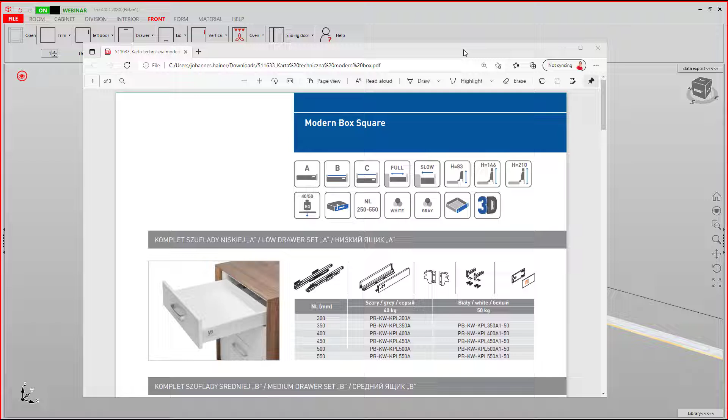Hello. In this tutorial we will add these drawer boxes, or some of them, to TrunCAD.

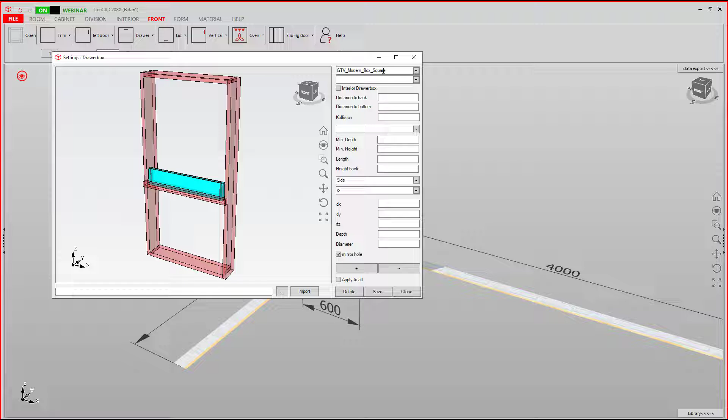Therefore, we go to Front, here to Drawer, and to Hardware Settings. First of all, we need to give our new system a name. Then, we need to specify if it is a wooden drawer or a drawer box system. Additionally, you have the option to set it to interior drawer box.

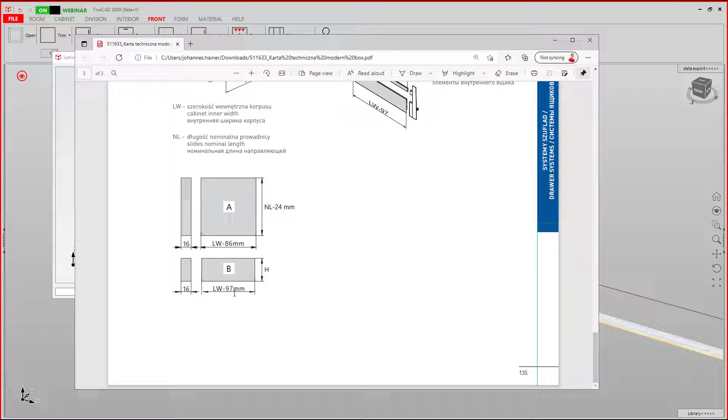Here we need to specify the distance from the side to the back of the drawer and to the bottom of the drawer. As we can see here, we have 86 divided by 2 is 43, and 97 divided by 2 is 48.5 millimeters. This means we have here 48.5 millimeters and here 43 millimeters.

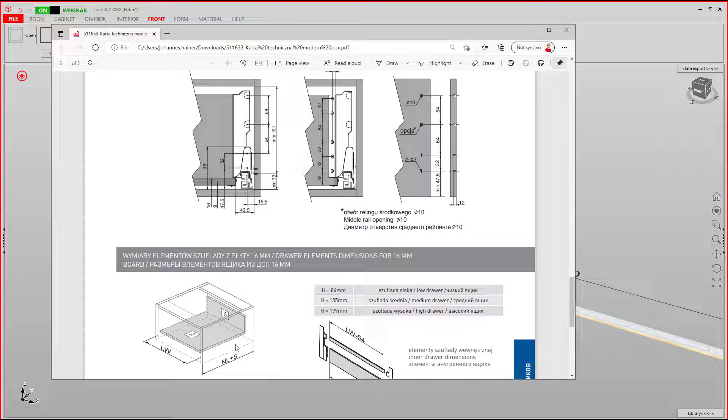Here we need to set a name for each specific drawer box. Then we need to set the minimal depth, which is nominal length plus 5 millimeters. Then we need to set the minimal height, which is 33 plus 63.5 equals 96.5 millimeters.

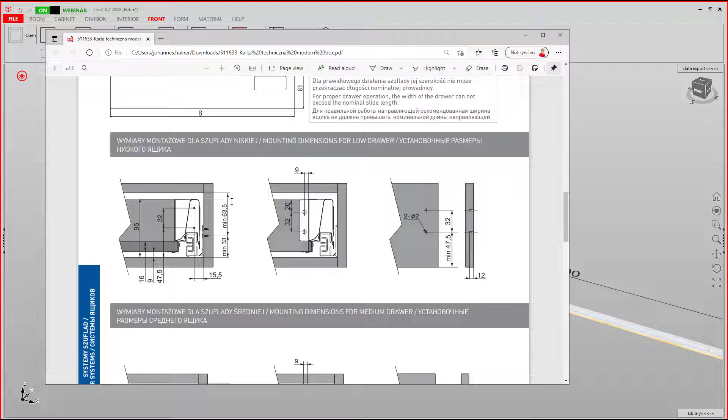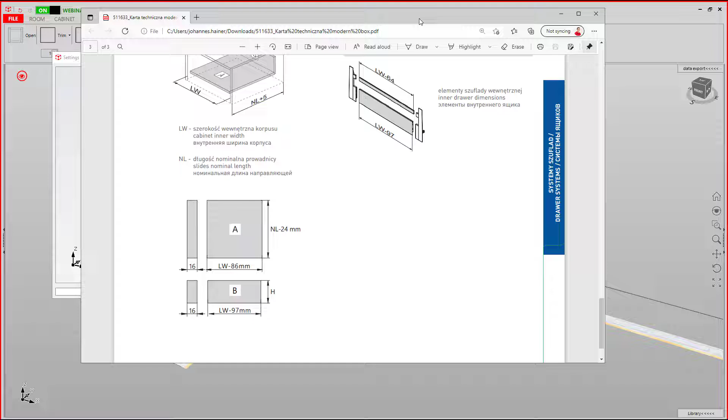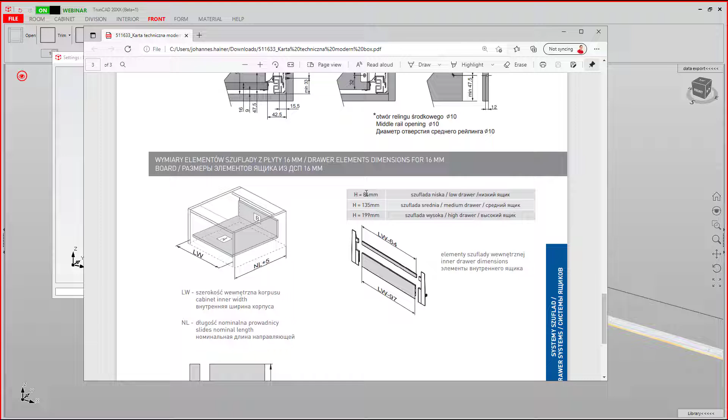Then we need to set the length of our bottom part, which is nominal length minus 24 millimeters, which equals 276 millimeters. And the height of our back panel, which is given at 84 millimeters. Now that we have specified the wooden parts for our drawer box, we can begin to set the boreholes.

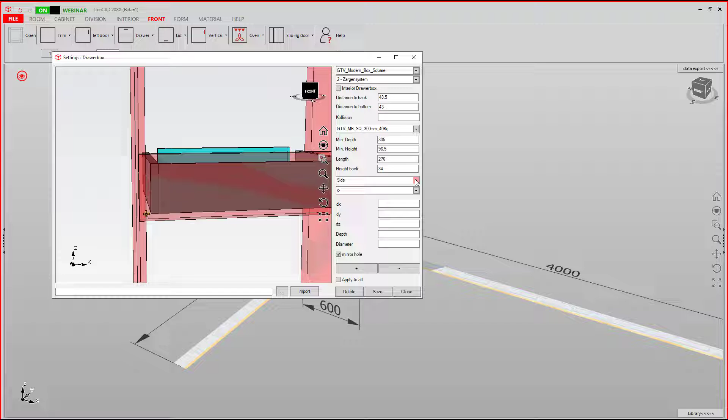First of all, we want to set the boreholes for the side of our cabinets. Therefore, we take here sides and specify the direction of the boreholes, which is x minus. Also, we want to enable mirror hole, so that the holes we create on the left side of the cabinet automatically mirror to the right side of the cabinet.

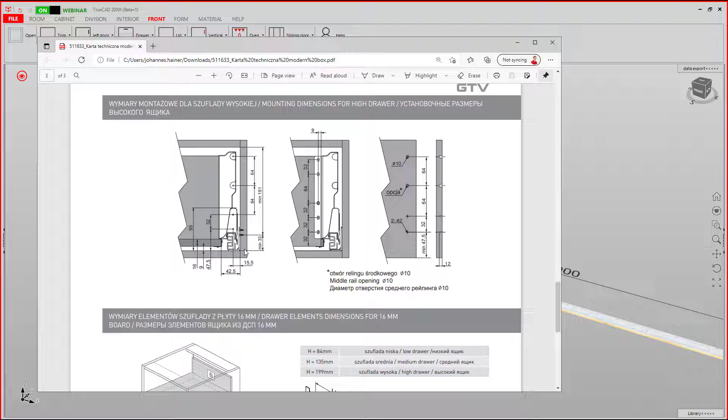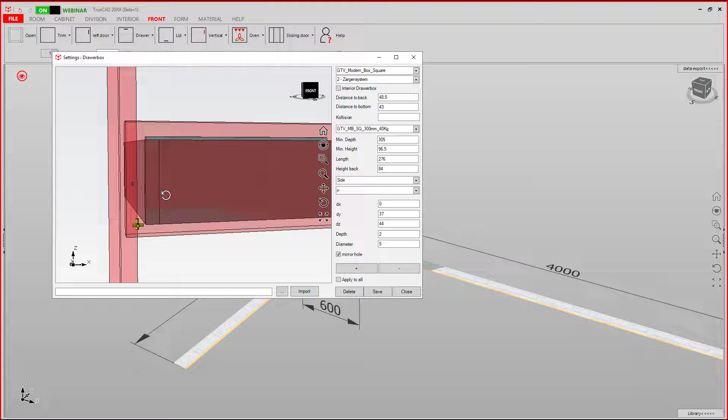So we want to set our first hole in x 0 and y to 37, in Z to 33, plus 11 millimeters, set a depth of 2 millimeters since we have screw mount and a diameter of 5. Now we click plus to add this borehole. And as you can see, the borehole gets created.

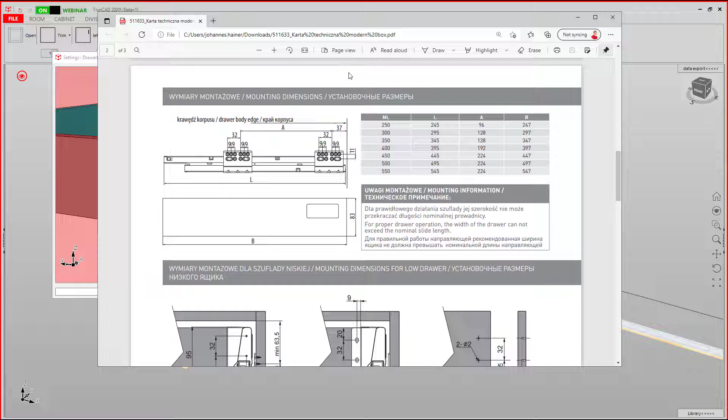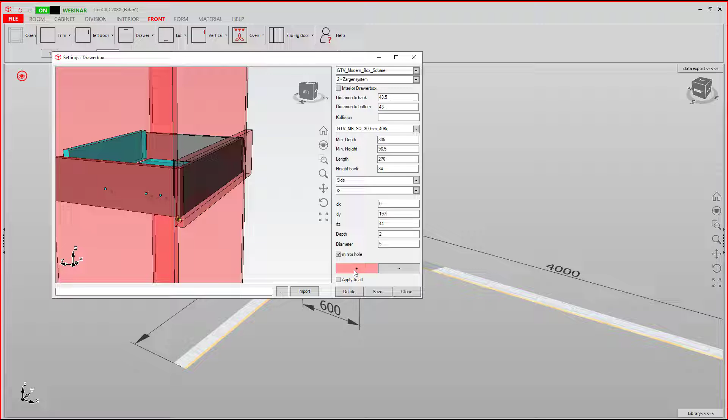As you can see here, our next borehole is at 37 plus 32 mm, which equals 69. We change this here and hit plus again. Then our next borehole is at 37 plus 128 mm, which equals 165 mm. Our next borehole is an additional 32 mm to the back, which equals 197 mm. Then we hit plus again. Now we have our boreholes on the sides.

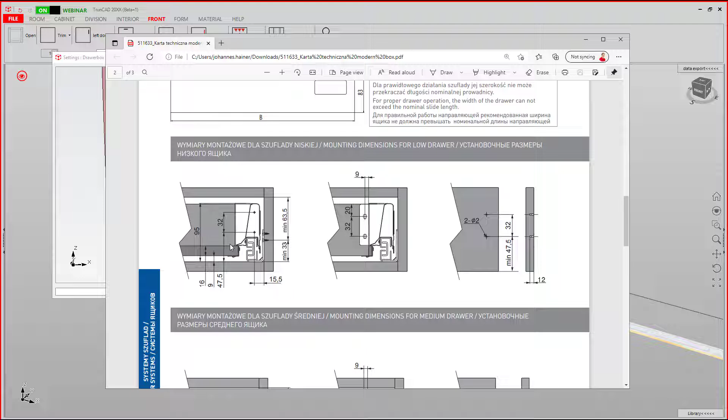Now let us add the boreholes on the front. As we can see here, they are 15.5 mm from the side of the cabinet and 47.5 mm from the bottom of the cabinet. The direction for these boreholes is in Y-. Y is 0 in this case. And then hit plus. Our next hole is 47.5 mm plus 32 mm, which equals 79.5 mm. And hit plus again.

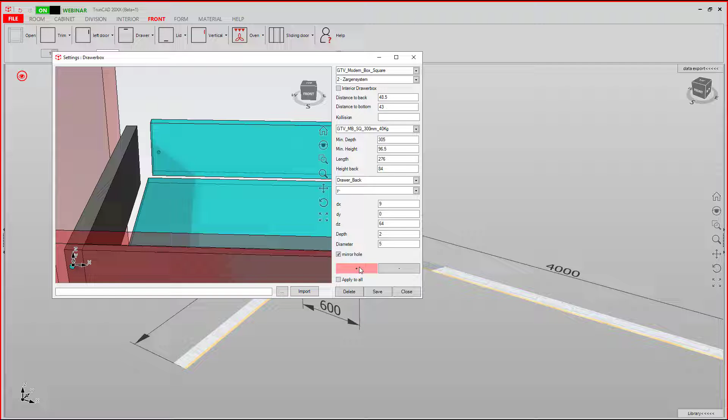Now the only part that's left are the boreholes for the back of our drawer box. Let us quickly add these. Now we have here 9 mm in X, 32 mm in Z, also a depth of 2 and diameter of 5. Our next hole is at Z, 64 mm. Then hit plus again. Now that we have all our boreholes and our parts have the correct sizes, we can hit save.

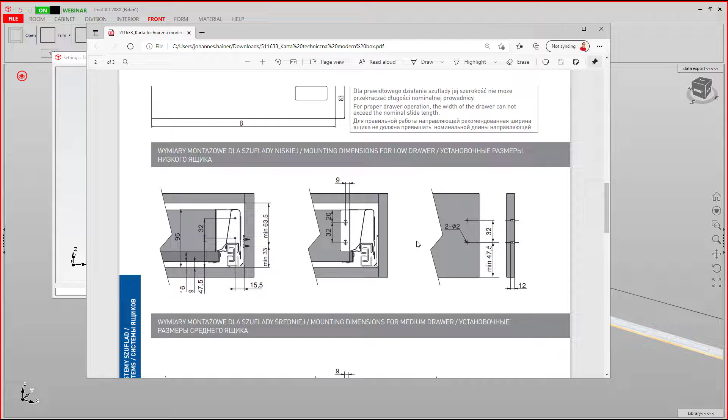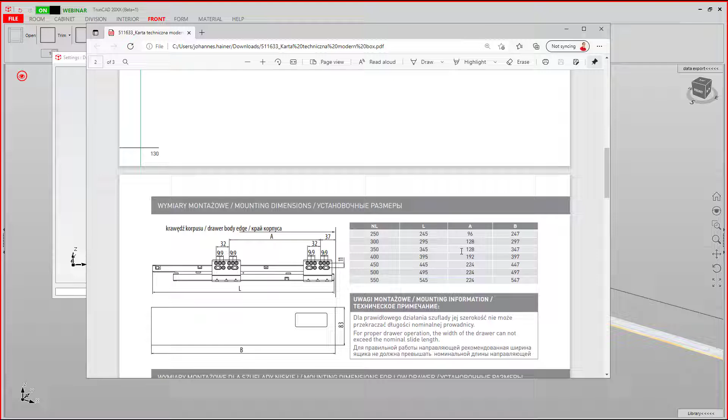Now we want to add another depth. We want one with a nominal length of 350 mm, which is also 128 as A, with the same height, and only 50 mm deeper. We have to change the following values: the minimal depth, the depth of the bottom of our drawer, and that's it. Now we can hit save again.

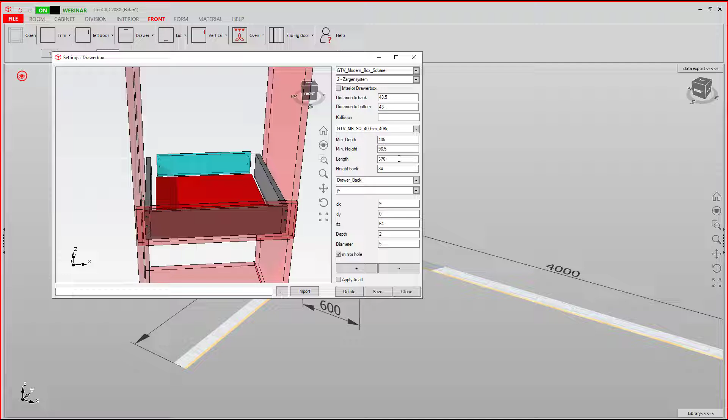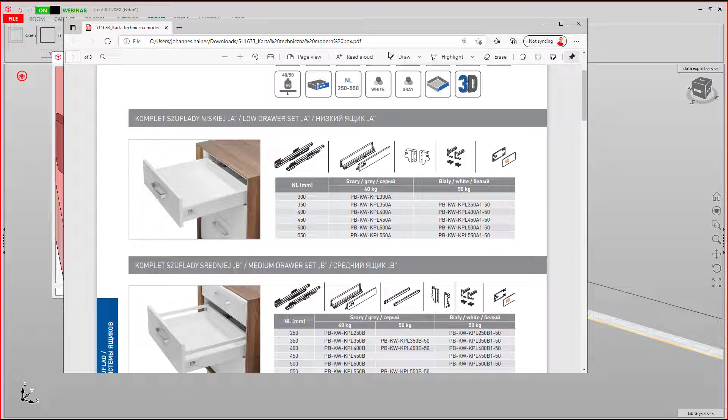If we want to add another one with 400 mm in depth, we need to change this value. And this value. And then we also need to change these boreholes here, because A is now 192. And 192 plus 37 millimeters is 229 millimeters.

So we first select our borehole, then we enter 229, hit plus, and then minus again to remove the other hole. Now we do the same thing for the next hole. We have here a Y value of 261. Now we hit again plus and minus to remove the other hole. Now we are done and we can hit save.

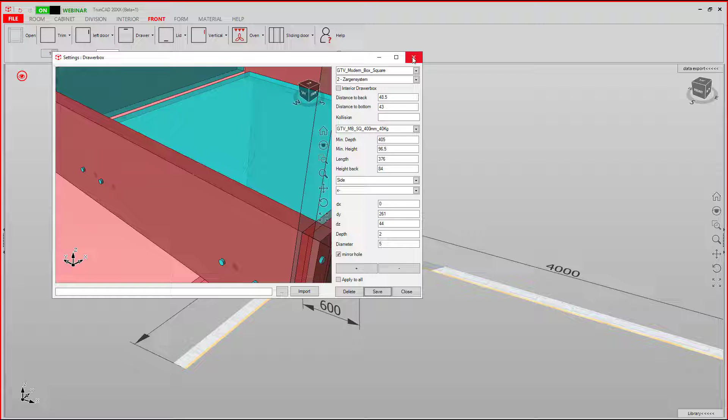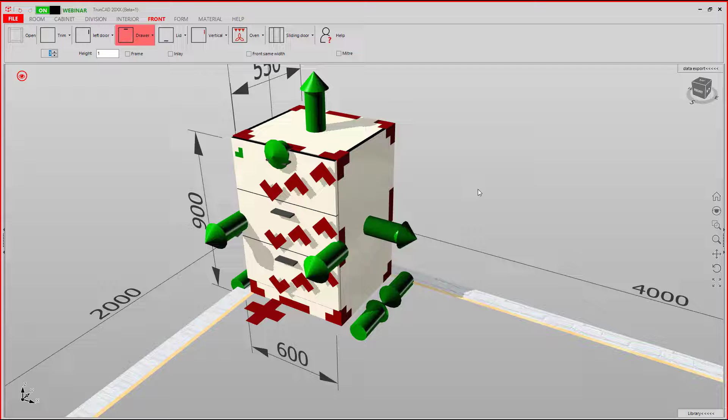If we now take some drawers, select our box system and put these drawers inside of this cabinet, you can now see the drawers we just created. This is also visible in our parts list here.

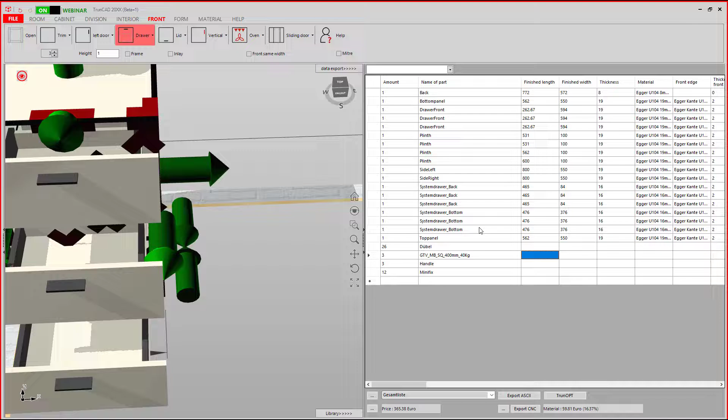Don't forget to specify a price in the calculation settings. This was how to add drawer boxes to TrunCAD.